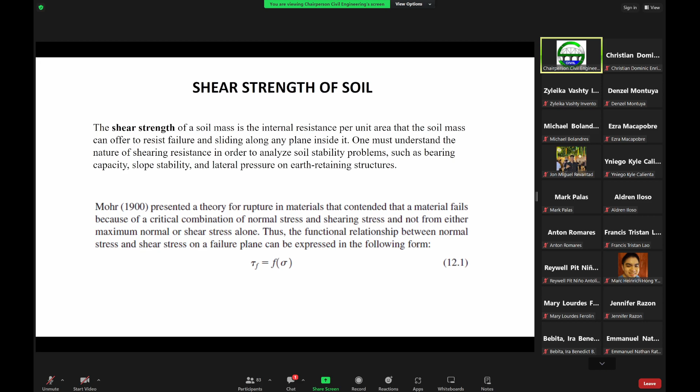Now, the same concept we apply here in geotechnical engineering, so the same definitions for normal stress and shear stress. We consider the normal stress with respect to the failure plane, and then the shear stress with respect to the failure plane. Now, the failure envelope defined by the equation which we have just seen earlier is basically a curved line.

Now, for most soil mechanics problems, it is sufficient to approximate the shear stress on the failure plane as a linear function of the normal stress, according to Coulomb. So this linear function can be written as shown in this equation here, 12.2 in your book. Don't worry with all my slides, because all of this can be found in your book if you want to recall later.

So again, this linear function is giving us the shear stress at failure, or the shear strength. So the shear strength at failure, that's tau, is equal to C, where C is the cohesion, plus sigma, where sigma is the normal stress on the failure plane, multiplied by the tangent of the angle of internal friction.

Wherein the cohesion and the angle of internal friction are what we call the shear strength parameters. So in everything that we do in geotechnical engineering, we always try to determine the cohesion value and the friction angle value for any type of soil and for any relative density as well as consistency of the soil.

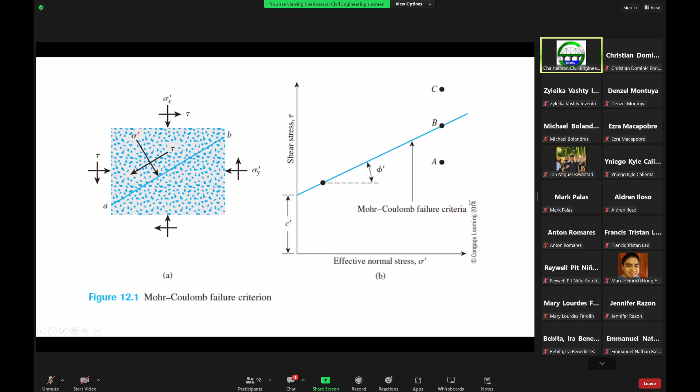The two equations that we have seen so far are the expressions for the shear strength based on total and effective stresses, respectively. Now, here we have some typical values commonly found in the field. So here there are some generalizations.

Generalizations that the value of the effective cohesion, C prime, for sands and inorganic silts is zero, wherein sands and inorganic silts, hopefully by now you are already familiar with how to classify them based on the USCS, the Unified Soil Classification System.

Now, in the case of normally consolidated clays, last time we discussed the difference between normally consolidated clays and overconsolidated clays, depending on the overconsolidation ratio. That's why it's important to understand the difference between normally consolidated and overconsolidated clays, because with respect to the shear strength parameters, they can be quite different.

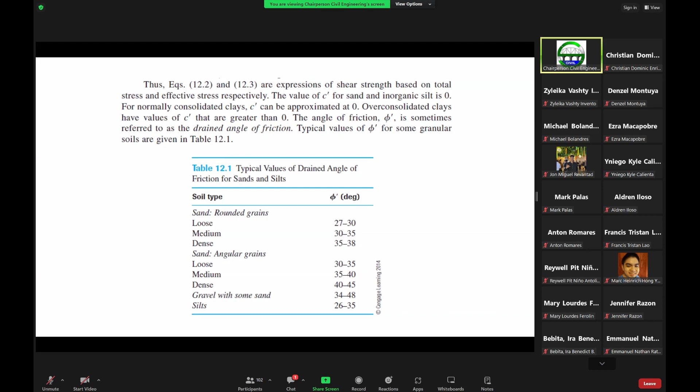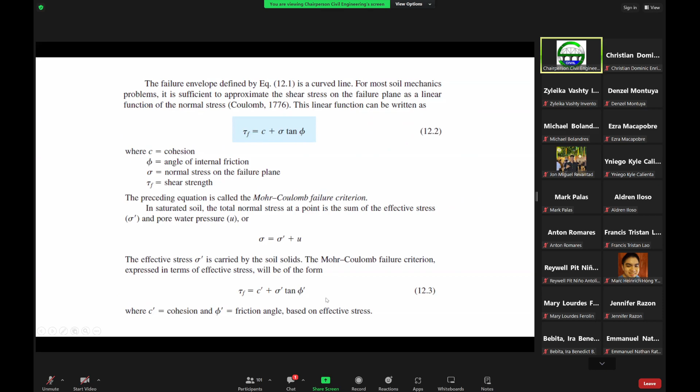So, as stated in the Mohr-Coulomb failure criterion, failure from shear will occur when the shear stress on a plane reaches a given value as given by this equation. So when you have this equation, that means you now have failure. To determine the inclination of the failure plane with respect to the major principal plane, we can refer to this figure.

For example, you now have the failure plane EF. This failure plane creates an angle of, let's say, theta with respect to the major principal axis. Here we have sigma sub 1 prime and sigma sub 3 prime. Sigma sub 1 prime is what we call the major principal stress.

If this is the major principal stress, then sigma sub 3 prime is what we call the minor principal stress. The major principal stress is along the direction of the load, where we apply the load, for example, the load from your house. The line DC perpendicular to the major principal stress is what we call the major principal plane.

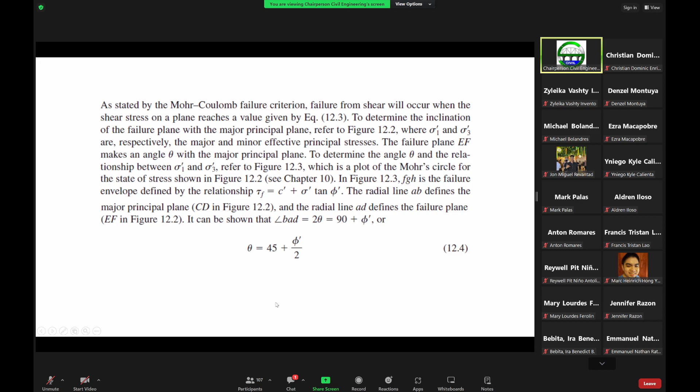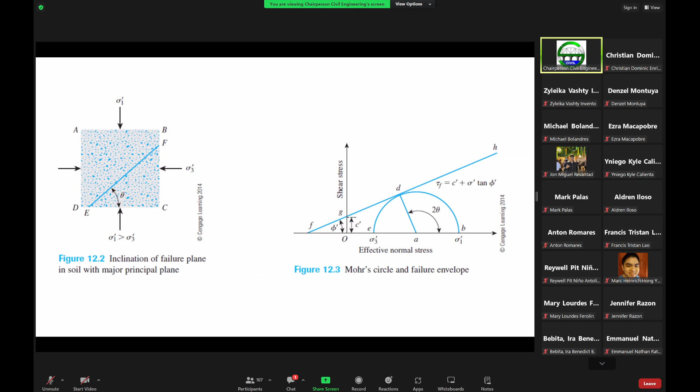So 2 theta is now equal to 90 degrees plus phi prime, the effective friction angle. Then if you want to determine theta, we just simply divide everything by 2. So theta is equal to 45 degrees plus phi prime over 2, where phi prime is your effective friction angle. So if you have some idea of the friction angle of a certain soil material, then we can roughly have some idea of the angle of the failure plane, where it would fail.

So there are several laboratory methods available to determine the shear strength parameters, either total shear strength parameters, C and phi, or the effective shear strength parameters, C prime and phi prime, for various soil specimens. These are enumerated here: the direct shear test, the triaxial test, the direct simple shear test, the plane strain triaxial test, and the torsional ring shear test.

I think the last three are normally used for research purposes, but the first two here, the direct shear test and the triaxial test, are the ones most commonly used in the academe, or in teaching work, for laboratory exercises, as well as in actual practice. In actual practice, we normally specify direct shear test and triaxial test, depending on the sample that can be extracted from the geotechnical investigation. And then we have them brought into the laboratory. Okay.

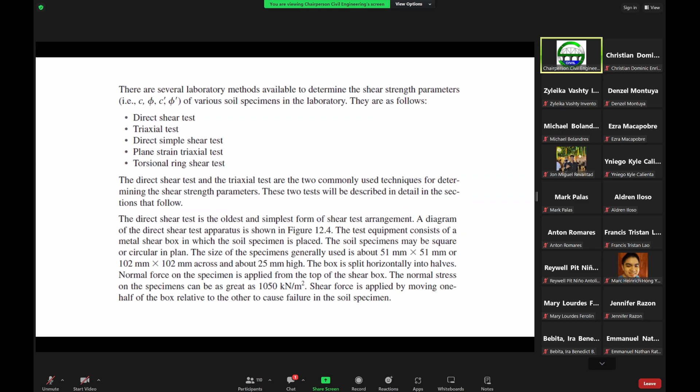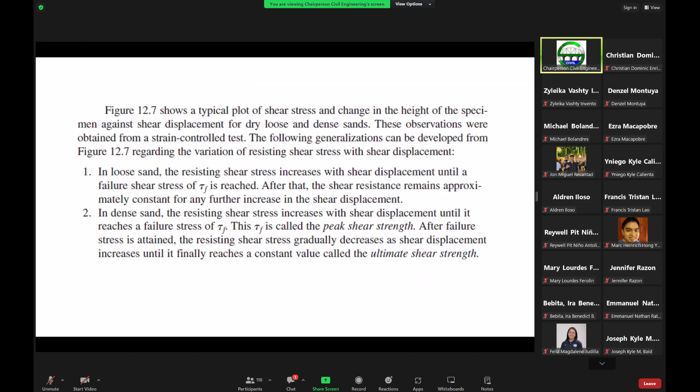And then after the sample has already failed, the resisting shear stress will decrease with continuously increasing shear displacement, until it reaches what we call the ultimate shear strength in the case of dense sand. So they will be reaching the same point here for the ultimate shear strength. Normally in practice, we are more interested in the ultimate shear strength of the material.

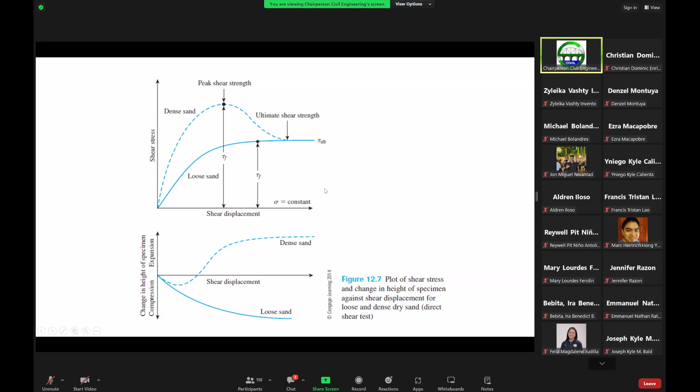Now, in the direct shear test arrangement, the shear box that contains the soil specimen is generally kept inside a container that can be filled with water to saturate the specimen. In a direct shear test, we can perform what we call a drained test, which is done on a saturated soil specimen by keeping the rate of loading, that's the application of this load here, low enough so that the excess pore water pressure generated in the soil is dissipated completely by drainage.

So that means the soil specimen is undergoing consolidation. I think last time we were discussing consolidation settlement. So the pore water from the specimen will be drained through the two porous stones above and below the soil specimen. I think you have that figure in your book, you can just look at that.

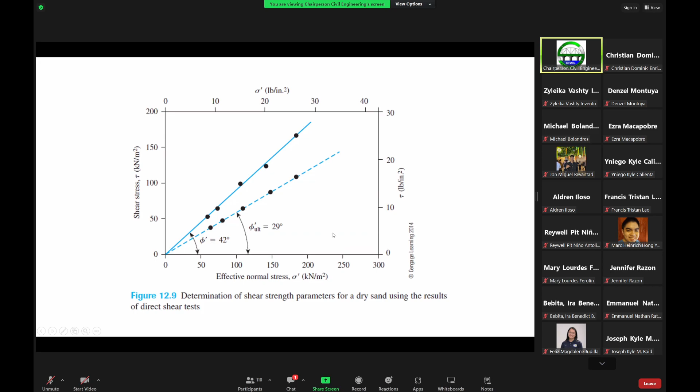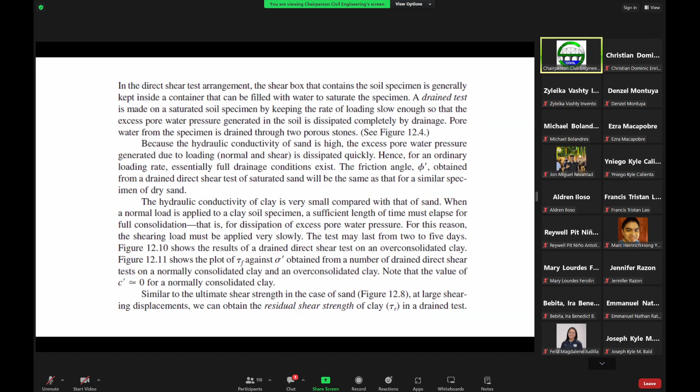For example, if you have clay which failed after a slope failure, then that clay will now have a residual shear strength. It's no longer the peak shear strength. So in a slope, for example, if you have clay, before the slope fails, then you have the peak shear strength of the soil sample. But after the slope failure, the soil sample will now have the residual shear strength.

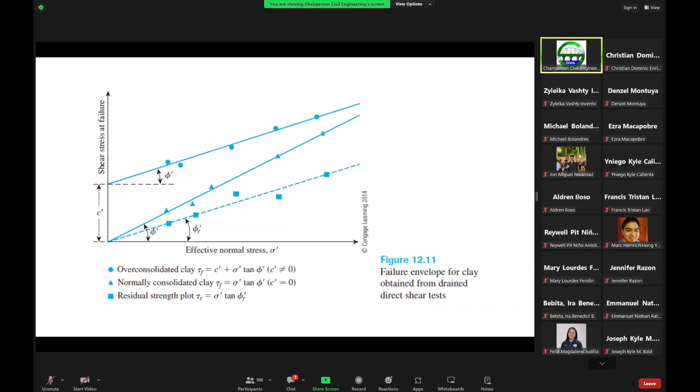So again, the residual shear strength parameter is smaller than the peak shear strength parameter with respect to the clay, obtained from drained direct shear tests. So far we have discussed the direct shear test. So now let us discuss the triaxial shear test.

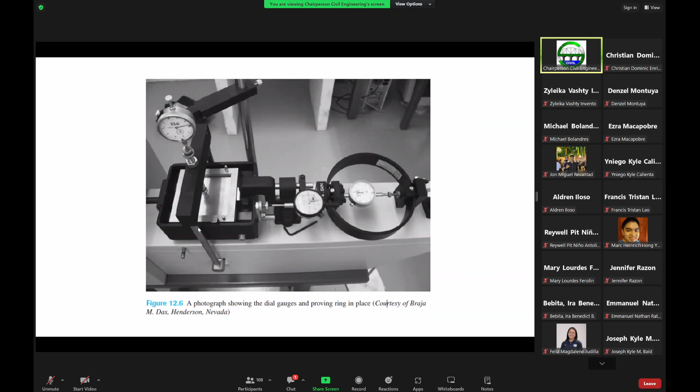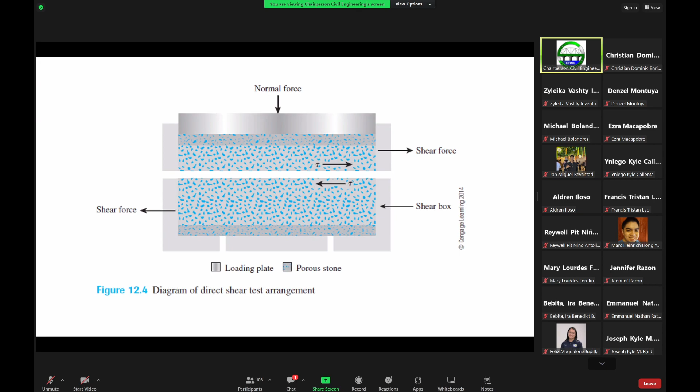Now, the triaxial shear test is one of the most reliable methods available for determining the shear strength parameters, because here we don't dictate the failure plane in the sample, unlike in the direct shear test, wherein we force the sample to fail in this direction, and so there will be stress concentrations. So that's why the triaxial shear test is more reliable, because we don't dictate the failure plane in the soil sample. So that's why in research purposes and in conventional testing, it is more widely used.

Earlier we mentioned sigma sub 1, which is your major principal stress, and sigma sub 3, your minor principal stress. So the minor principal stress, or sigma sub 3, is equivalent to the confining pressure generated by the water surrounding the soil specimen in a triaxial test, whereas the axial load will create your sigma sub 1, which is your major principal stress.

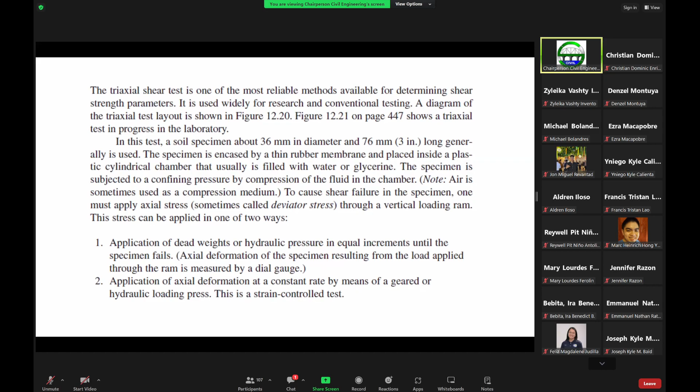So this can be applied in two ways. One can be the application of dead weights or hydraulic pressure in equal increments until the specimen fails, or the application of axial deformation at a constant rate by means of a geared or hydraulic loading press. So item two here is what we call a strain controlled test, whereas item one is a stress controlled test.

So you have here a picture of an ongoing triaxial test. Here for this triaxial test, they have used a proving ring for the application of the load, wherein here you see the soil sample being encapsulated by a rubber membrane. Then this can be surrounded by water.

So here you have a clearer picture, which I took in Japan, when we also did some triaxial tests. So here you see the soil sample being encapsulated by a rubber membrane. Then here you see the water that will generate some confining pressure to the soil sample.

If you notice here, the difference would be that here the chamber is fully filled with water, and the sample is fully saturated. Whereas here, the sample is not fully saturated, and the chamber is also not fully filled with water. This one is only creating a pore water pressure increase in the sample, wherein we can measure the pore water pressure.

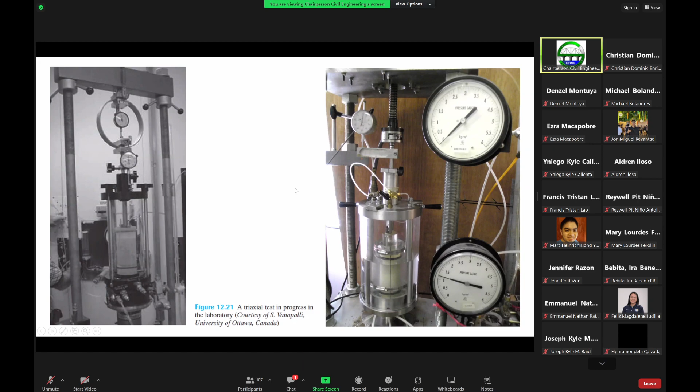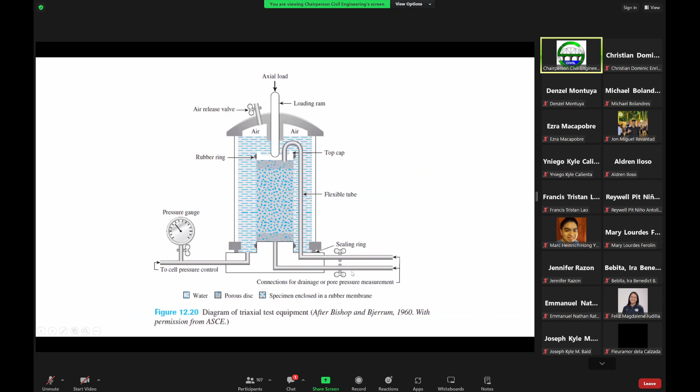And then during the application of that load, the drainage connection is kept open. So we keep open the drainage here at the bottom. And so, since you apply the load very slowly, the slow rate of the deviator stress application would allow complete dissipation of any pore water pressure that develops. Then as a result, the pore water pressure increase with respect to the deviator stress, that's u sub d, will then be equal to zero over time.

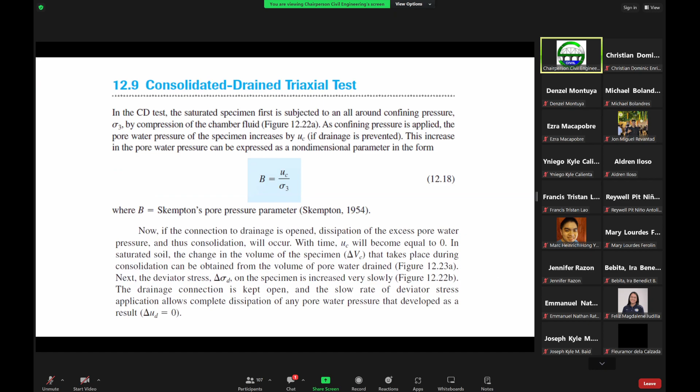So here we have just a diagram of the consolidated drained triaxial test, wherein here in figure A, you have the specimen under the chamber confining pressure during the consolidation stage. So during the consolidation stage, you have only sigma sub 3, or the confining pressure, acting on the soil sample because of the surrounding fluid, either water or glycerine.

So here in figure B, you have the deviator stress application, wherein aside from the confining pressure surrounding the soil, you also have the vertical forces due to the deviator stress application, due to the application of the vertical load from the vertical loading ram.

Now, the pore water pressure developed during the test is completely dissipated because you have a drained test condition. So pore water pressure is completely dissipated. That means the soil has fully consolidated, considering our discussion last meeting on the consolidation process. So in this case, the total and the effective confining stress are equal, or sigma sub 3, your total confining stress, is just equal to the effective confining stress.

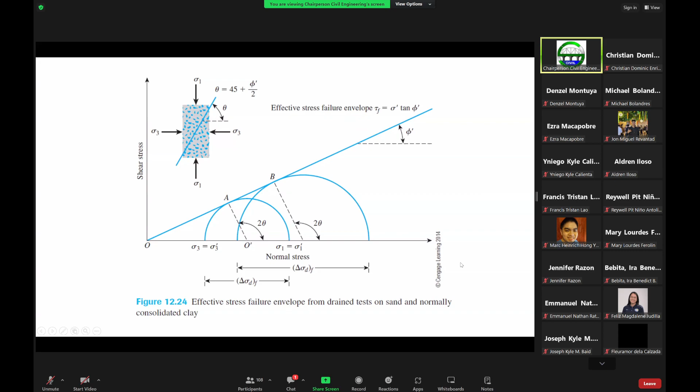So for normally consolidated clay, you only have this effective stress failure envelope. But for an over-consolidated clay, you have this one for your effective stress failure envelope, wherein we now call this your phi sub 1 prime. So depending whether you have an over-consolidated or normally consolidated clay sample, the effective cohesion can be zero or it can have a value.

Okay. So next we have the consolidated undrained triaxial test. In practice, the consolidated undrained triaxial test is the most common type of triaxial test, wherein we also do pore water pressure measurement. In this test, the saturated soil specimen is first consolidated by an all-around chamber fluid pressure. That's your sigma sub 3.

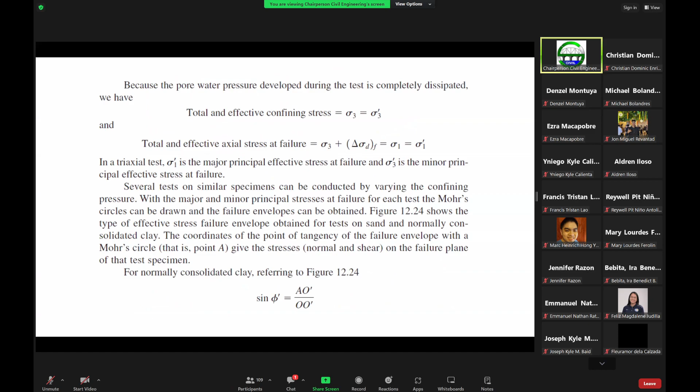So, unlike the consolidated drained test, the total and the effective principal stresses are not the same in the consolidated undrained test. In the consolidated drained test, the total and effective principal stresses are the same, as you may recall here. But in the consolidated undrained test, the total and the effective stresses are not the same.

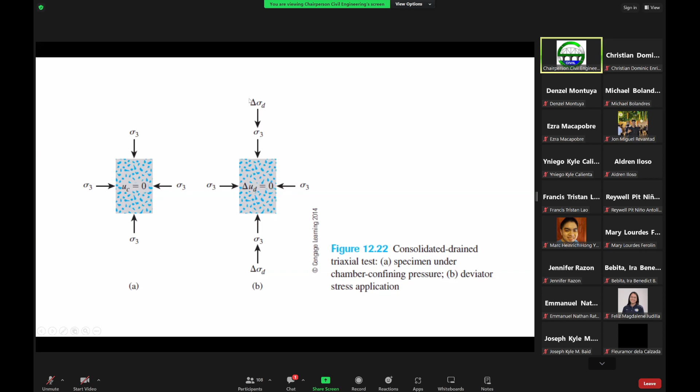So here, for example, the major principal stress at failure for the total stress case is equal to sigma sub 3, the confining pressure, plus the deviator stress at failure, which equals sigma sub 1. So that's this one here. If we go back, sigma sub 3 plus the deviator stress is equal to sigma sub 1.

While the major principal stress at failure for the effective case is equal to sigma sub 1 minus the increase in the pore water pressure due to the deviator stress at failure, which is now equal to sigma sub 1 prime. Now, the minor principal stress at failure for the total stress behavior is equal to the confining pressure, which is sigma sub 3.

While the minor principal stress at failure with respect to the effective case, that's your sigma sub 3 prime, is now equal to sigma sub 3, which is the confining pressure in the chamber, minus the pore water pressure increase due to the deviator stress at failure. Okay.

Now, if we subtract these two equations here, we can see that sigma sub 1 minus sigma sub 3 is just equal to sigma sub 1 prime minus sigma sub 3 prime, because this one will be canceled out. So that means that this term here is just equal to this term, the pore water pressure increase due to the deviator stress at failure.

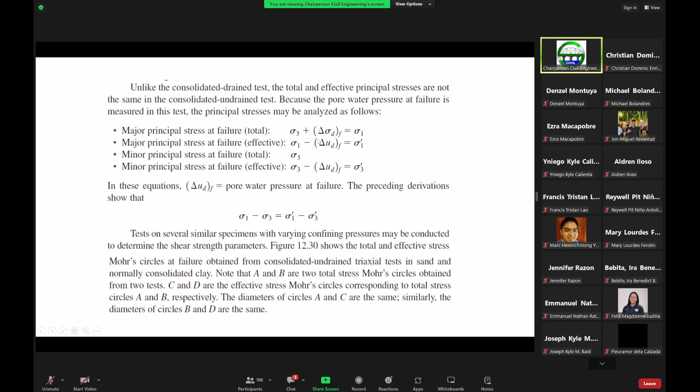So here we have the failure envelope with respect to the total stress approach, wherein you only have the normal stress here. But if we consider now the effective stress behavior, wherein we subtract the increase in the pore water pressure due to the deviator stress at failure between sigma sub 1 and sigma sub 1 prime, and sigma sub 3 and sigma sub 3 prime, that's actually this one here. So sigma sub 1 at the total minus the pore water pressure will give you the effective. That gives you this line here, this difference.

So that means if we subtract the pore water pressure from the total stress parameters to arrive at the effective stress parameters, then these Mohr circles will shift to the left in such a way that the failure envelope at these Mohr circles will generate a phi prime value. And here you can see that the phi prime, or the effective friction angle, is greater than the total stress friction angle.

Here we expect the effective friction angle to be bigger because you don't have the pore water pressure anymore helping in the resistance of the load. That's why we always prefer to have the effective stress shear strength parameters over the total stress shear strength parameters.

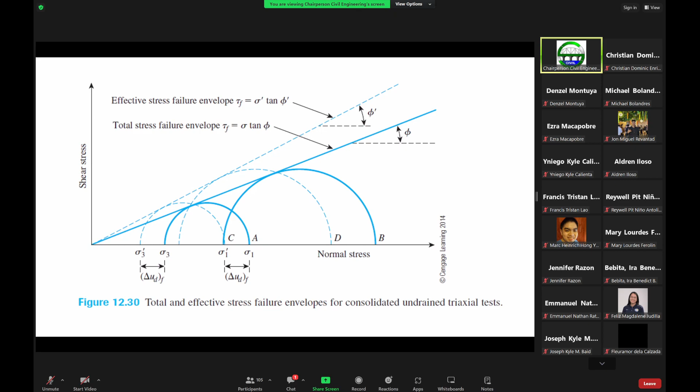So even though we have done here undrained testing, which is supposed to be a total stress approach, since we measured the pore water pressure, for the CU test with pore water pressure measurement we can still determine the effective stress parameters, the same as what we can derive from the consolidated drained test, which can take some time to do in the lab.

Okay. Now, in the case of the consolidated drained test, I hope you're seeing my cursor, on clay soils this can take some considerable time, the same as what we have seen in the drained direct shear test for clays.

For this reason, the consolidated undrained test, or the CU test, can be conducted on such soils with pore pressure measurement to obtain the drained shear strength parameters. Since drainage is not allowed in this test during the application of the deviator stress, they can be performed quickly. So that's why it would be good to measure the pore water pressure increase during the consolidated undrained test.

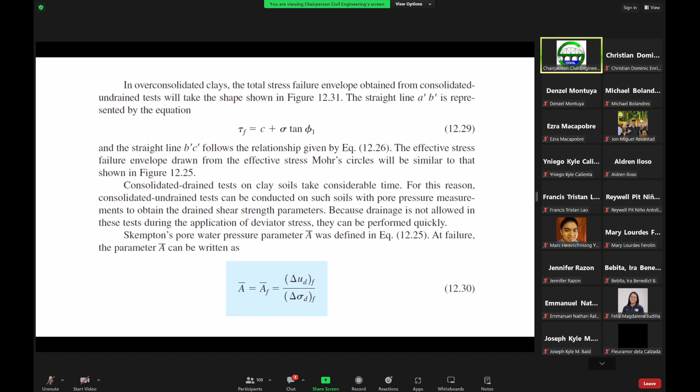So the last one is the unconsolidated undrained triaxial test, or we call it the UU test in practice. In the unconsolidated undrained test, drainage from the soil specimen is not permitted during the application of the chamber or cell pressure sigma sub 3. That means there is no dissipation of pore water pressure, so there is no consolidation of the specimen. That's why we call it unconsolidated.

And then the test specimen is sheared to failure by the application of the deviator stress, delta sigma sub d, which is your sigma sub 1 minus sigma sub 3, but the drainage is still prevented. So during the application of the cell pressure as well as the deviator stress, the drainage is closed. Since drainage is not allowed at any stage, the test can be performed quickly.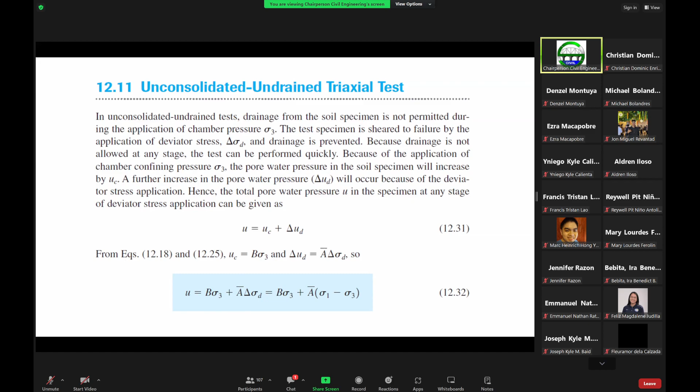So just substitute this one here, then we get this equation for the total pore water pressure U. Now, the UU test is usually conducted on clay specimens because it can be done quite fast. It depends on a very important strength concept for cohesive soils, if the soil is fully saturated.

Now, in the UU test, the added axial stress at failure, delta sigma sub d at failure, is practically the same regardless of the chamber confining pressure. For example, this is a result of a UU triaxial test on a fully saturated cohesive soil. Since we are doing an undrained test, the UU test is also what we call the undrained test.

Whatever the value of the confining pressure, whether this one here or increased to this value or this value, the Mohr circles are just the same, which means the deviator stress is the same. In that case, you have a horizontal failure envelope with the friction angle equal to zero. This is a total stress approach, because we have undrained conditions, so the pore water pressure is helping in resisting the load.

So that behavior is what we call a phi equal to zero condition, with a horizontal failure envelope. With phi equal to zero, the shear strength at failure is just equal to C, the cohesion. In this case, we call it C sub u, which is defined as the undrained shear strength.

If you do a UU triaxial test, C sub u is just equal to the radius of the Mohr circles, this one here. Now in American codes, just try not to be confused, they sometimes use S sub u. C sub u or S sub u is the same, the undrained shear strength. Just a note that the phi equal to zero concept is only applicable to saturated clays and silts.

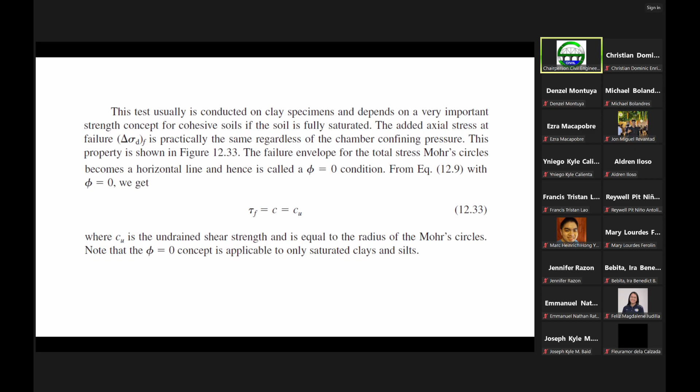Okay. Now, here we have the unconfined compression test. The unconfined compression test is a special type of a UU test that is commonly used for clay specimens. Now, in this test, the confining pressure sigma sub 3 is zero because there's no confining pressure. There's no chamber here.

For example, this figure here is an example of an unconfined compression test, where there's no chamber, so the soil is just exposed outside. So there is no confining pressure, which means sigma sub 3 is zero. Then an axial load is rapidly applied to the specimen to cause failure.

So at failure, the total minor principal stress is zero because there's no confining pressure, while the total major principal stress is sigma sub 1. So as shown here, there is no sigma sub 3, that's 0, but you have sigma sub 1, created by this load. There's no chamber, there's no confining pressure, so sigma sub 3 is 0.

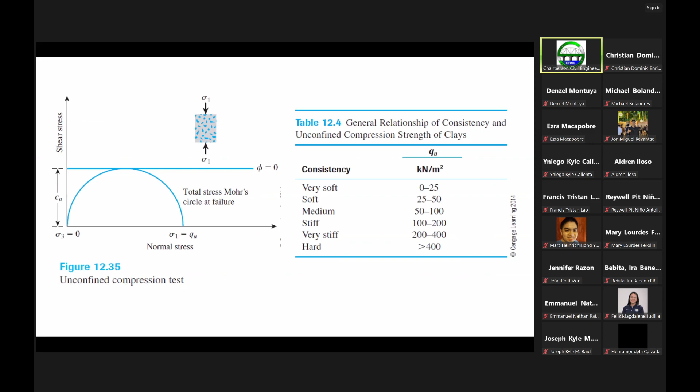So here we have examples of soil samples tested with unconfined compression test equipment. This one here is an example of a failure by shear. This is basically your failure plane. If this is your horizontal plane, it is more than 45 degrees, so that's 45 degrees plus phi prime over 2. So this is the failure by shear, and this one here is a failure by bulging. The sample didn't fail by shear, but it failed by bulging.

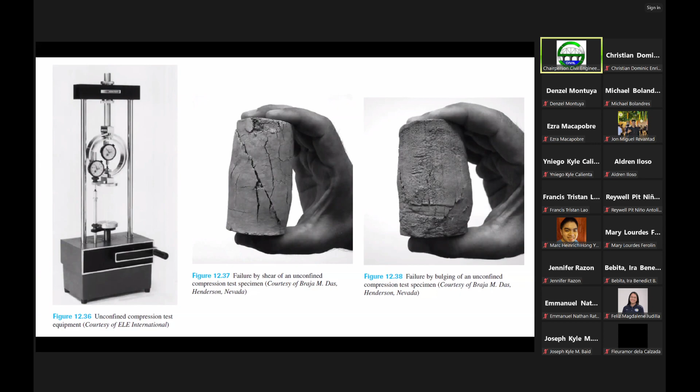Now, with respect to the testing of clays, we need to understand that some clays are sensitive clays, so let's be careful with sensitive clays. What do we mean by sensitivity? For many naturally deposited clay soils, the unconfined compression strength is reduced greatly when the soils are tested after remolding. Sometimes you can remold the clays for testing without any change in the moisture content.

So if the strength is reduced after remolding, this property of clay soils is what we call sensitivity, wherein the sensitivity is defined as the undrained shear strength of the undisturbed clay sample over the undrained shear strength of a remolded sample.

Now, the sensitivity ratio of most clays ranges from about 1 to 8. However, highly flocculent marine clay deposits, and I think we described before what we mean by flocculent structure, can have sensitivity ratios ranging from 10 to 80. And then some clays would turn into viscous fluids.

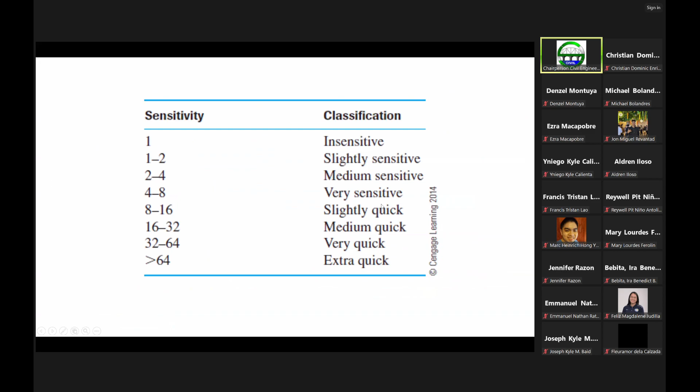Now, in the field. So far we have discussed the laboratory tests to determine the shear strength parameters of soils. If you don't have any lab equipment nearby, sometimes what you can do in the field is use some field equipment. You can do some in situ tests. One of these is the vane shear test.

Several empirical relationships have been proposed between the undrained shear strength and the effective overburden pressure, which we have been discussing in the previous lectures. The most commonly cited relationship is the one given by Skempton, as given in equation 12.35 in your book. So that's this one here, which is the undrained shear strength from a vane shear test over the effective overburden pressure, sigma sub O prime, equal to this one here with respect to the plasticity index. But this is only applicable for a normally consolidated clay.

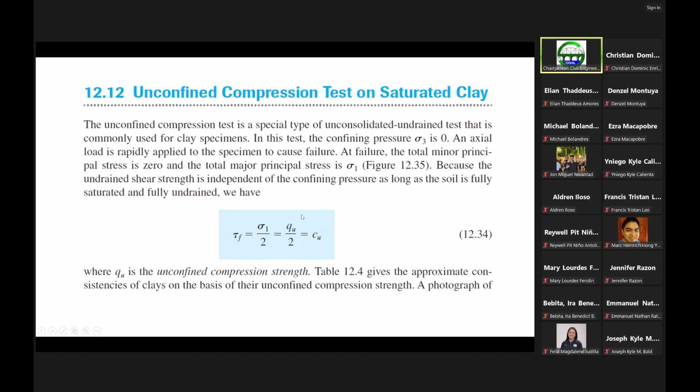So for this problem, we are asked to use Skempton's relationship as given here, since we have a normally consolidated clay. So in using this formula, since we are after the unconfined compression strength. We are after the unconfined compression strength. So if we want to get this, then this is just equal to 2 times the undrained shear strength. But the undrained shear strength using a vane shear can be provided by this one.

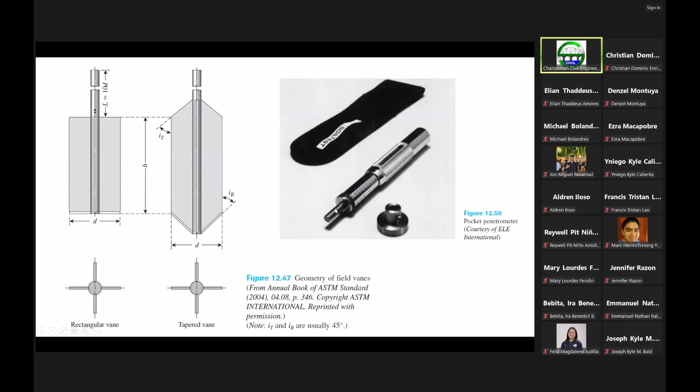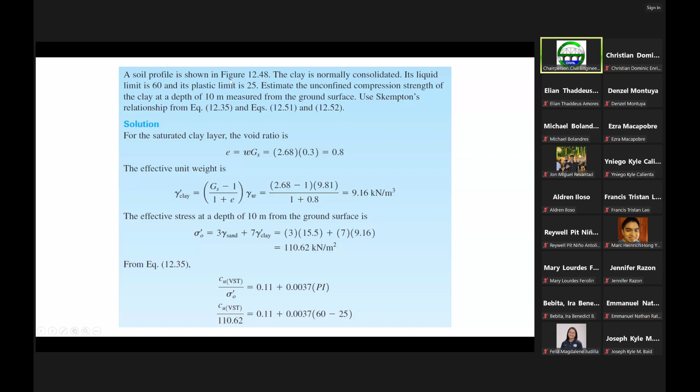And the plasticity index is equal to the liquid limit minus the plastic limit. So then we can get the value of the undrained shear strength based on the vane shear test conducted in the field. And then just apply corrections for the lambda to get the undrained shear strength to be used for design. So we have reduced it from 26 to 23, for example. And from there, we get the unconfined compression strength, which is equal to 2 times the undrained shear strength. So that gives you about 46 kilopascals.

So we have determined the unconfined compression strength based on the field. Or, if you can reach this depth, get a sample, bring it to the lab, and have it tested with an unconfined compression test. And hopefully we get the same results. So I think that's the end of my presentation.